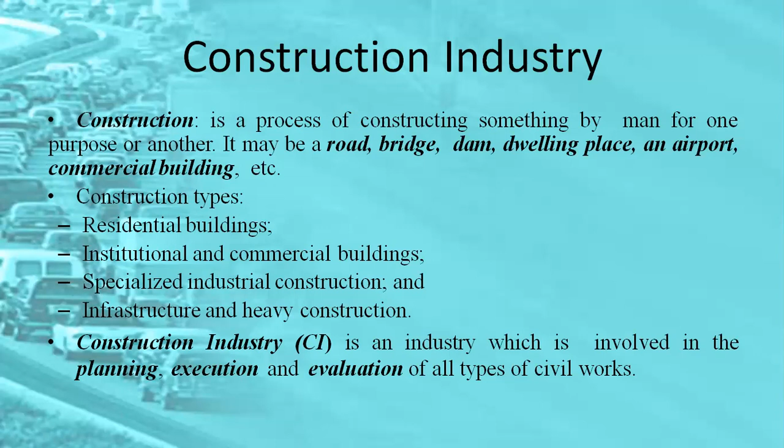If we see the term project, it is some form of human activity that has a beginning, a productive phase, and an end. It is creating something that did not exist before. A construction project is an investment of scarce resources with a definite objective, time horizon, and geographical boundary. Construction projects are mostly constructed on the ground and they are exposed fully to the local environment.

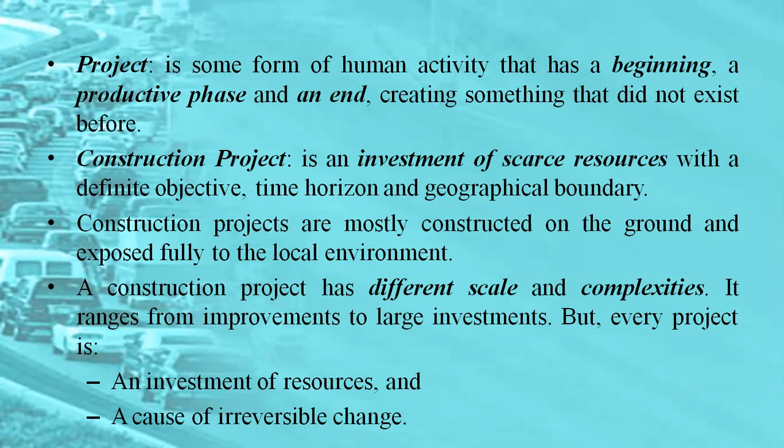Construction projects have different scales and complexities. They can range from improvements to large investments. But every project will have an investment of resources and a cause of irreversible change. These two points are very important while we are thinking about any construction project.

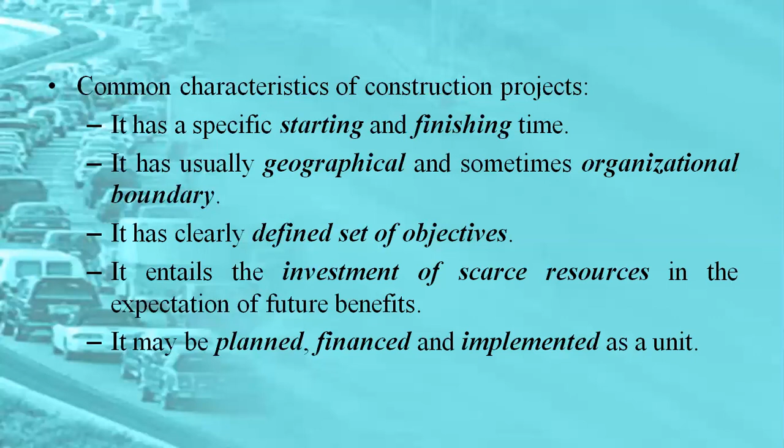Common characteristics of a construction project include: it has a specific starting and finishing time. It usually has a geographical and sometimes organizational boundary. It has a clearly defined set of objectives. It entails the investment of scarce resources in the expectation of future benefits. It may be planned, financed, and implemented as a unit.

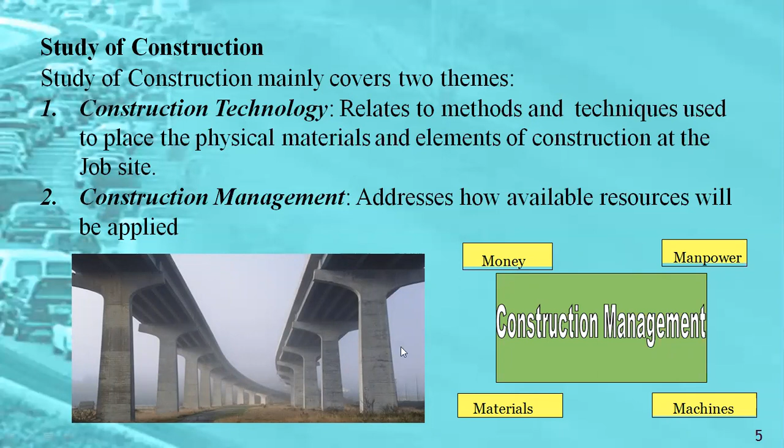So, the study of construction covers two main themes. First is construction technology, related to methods and techniques used to place physical material and elements of construction at the job site. Second is construction management, which addresses how the available resources will be applied. Construction management involves management of money, manpower, material, and machines. Basically, four M's come under construction management.

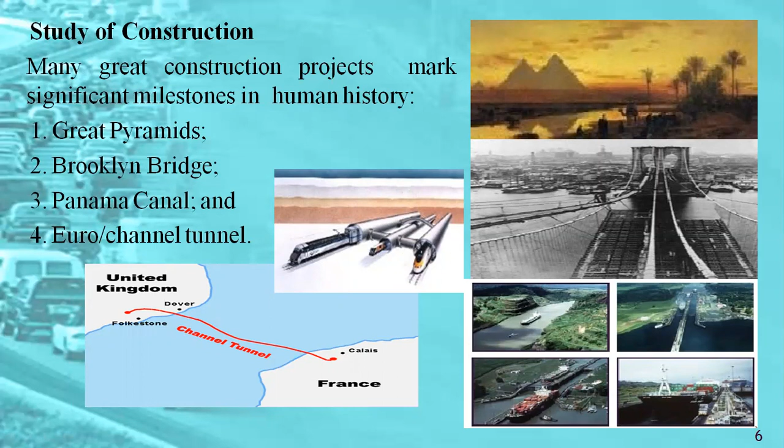The construction industry can be categorized into three major sectors: transportation and communication sector, water and energy sector, and building and other physical infrastructure. The transport and communication sector includes roads, railways, airways, and telecommunication related physical works. The second sector is water and energy works, including hydropower development, transmission lines, wind power generation, and irrigation projects. The third sector is building and other physical infrastructure.

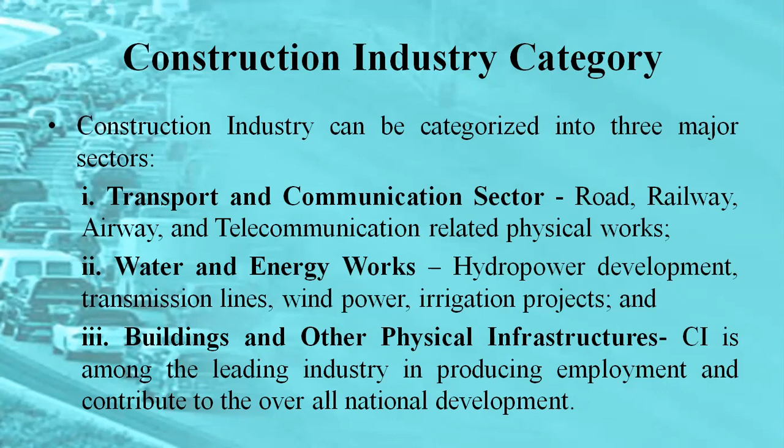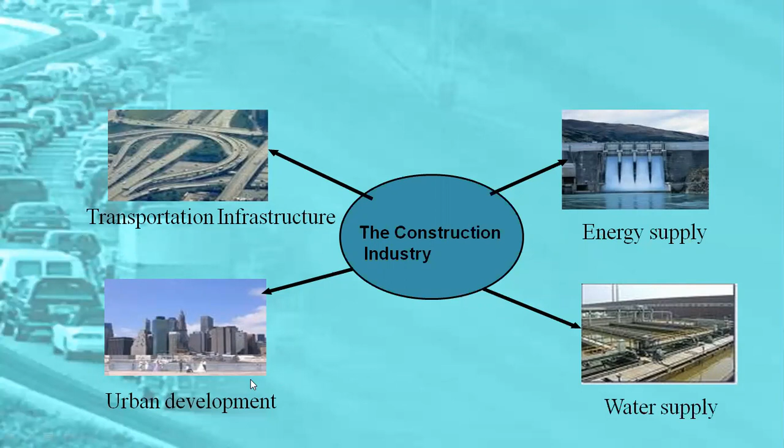The construction industry is among the leading industries in producing employment. It contributes to the overall development of the nation, and also by developing different infrastructure projects. So here we can say these are the four major sectors which form the construction industry: transportation infrastructure development, energy sector, urban development, and water supply, or we can say distribution network.

Now, different construction industry attributes. Among them, the nature of the construction industry depends upon the nature of production, that is, what is actually happening on the site. It includes a change in supply chain relationships at the production site. This industry is exposed to rather unpredictable weather conditions. It may have problems like seasonal disruption in the production lines, and health and safety concerns of the labor or safety concerns of the equipment.

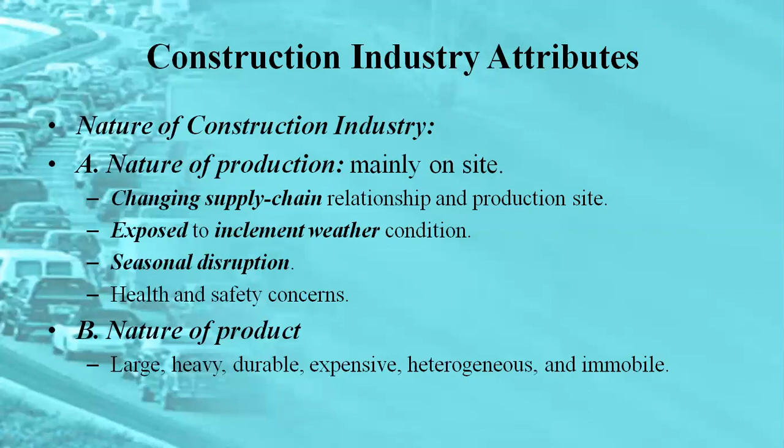Another is what type of product or what type of construction is going to happen. It can be large construction, heavy construction. We can use durable, expensive equipment. It can be heterogeneous. Some materials may be mobile, some may be immobile, like heavy cranes or fixed formworks. These are going to affect the construction industry.

Further, what is the actual demand of the product? Demand is usually dependent upon other goods and services. Demand cannot be controlled by the industry itself. In the majority of cases, clients define the requirements before the industry supplies. So the time lag between demand and supply is very crucial to decide the demand of the product.

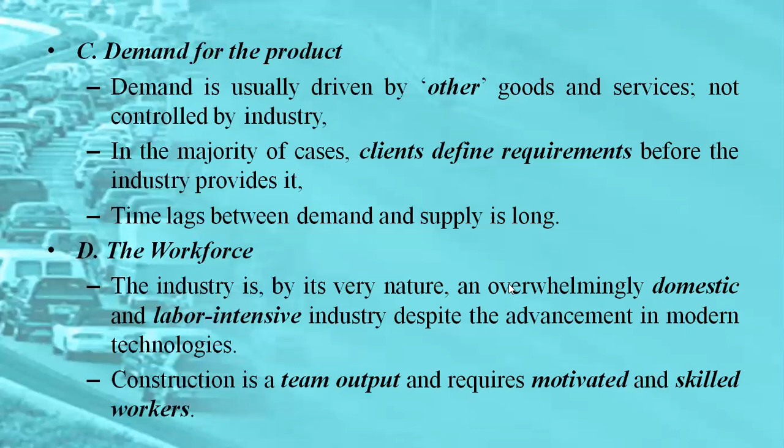The next important factor is the workforce. This industry by its nature is a domestic and labor intensive industry. Even after many advanced technologies, it is still dependent mainly upon manual work; it is a labor oriented industry. Construction is actually a team output, therefore it requires motivated and skilled workers, meaning it requires a good team.

So what defines the uniqueness of construction industry? This industry is actually a fragmented industry, meaning it is composed of many allied sectors, or it includes consultation of different experts. So if we try to put down the sequential process, first the need of the client has to be found out and highlighted.

Second comes design and planning for whatever has been needed. So if there is a need of a building, the plans and design can be made by the appropriate consultant, and then it is forwarded to the governing authority for appropriate sanction. After sanctioning, it will go to the tendering or bidding stage, and it has to be approved by the client. So the budgeted cost, the type of construction, the plans - these all have to be approved by the client.

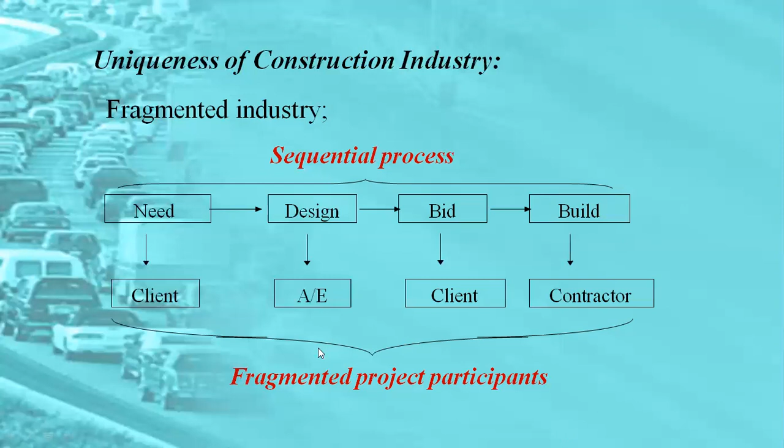After approval and finalization of the bid, a contractor is appointed and the contractor will do the actual construction activity. So at the top, we have written what are the sequential processes and what experts will be required, or what are the project participants who will perform this task or process.

If we see the amount of labor activity with respect to time, as the project starts in the initiating process, it requires less time and fewer activities. Even in the planning process, at the initial stage it consumes time and more effort, but with respect to time, as the plans are finalized, in the later stage the amount of activity will be less - only requiring some revision work.

In the execution process, initially the pace of work is less, but as time passes it requires substantial or large amounts of labor work involving large amounts of activities, and by the end of the process it becomes completely zero. Then the controlling process - throughout the project there should be proper control by a proper authority. Then at the last comes the closing procedures, meaning sanctions and approvals from different authorities, which are initiated only in the later part of the construction activity.

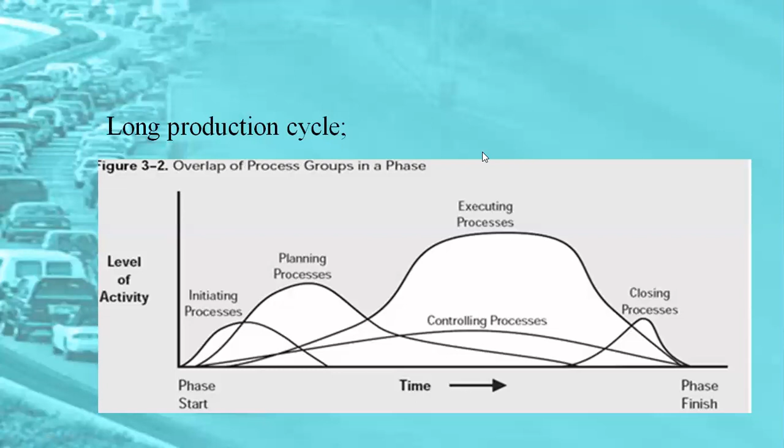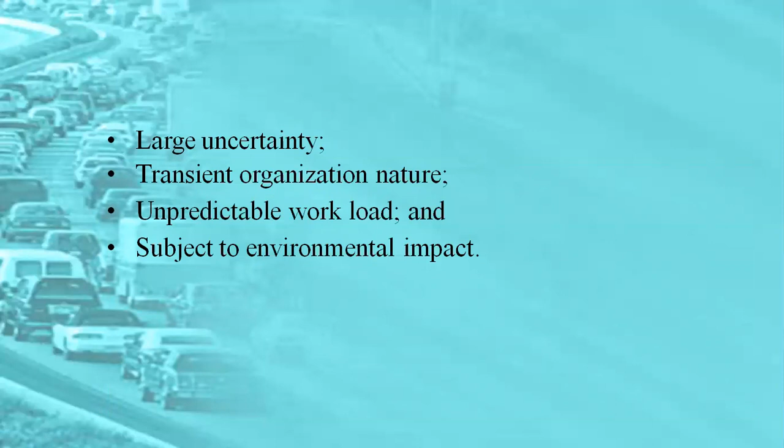So when we look at the uniqueness of the construction industry - importantly, it is largely uncertain. It has a transient organization nature. It has an unpredictable workload, and it is highly subject to environmental impacts.

Basically, what comes next is the role of the construction industry. Construction industry is the most important enabler for the social, economic, and political development of a country. It provides a basis upon which other sectors can grow, by constructing the physical facilities required for the production and distribution of goods and services.

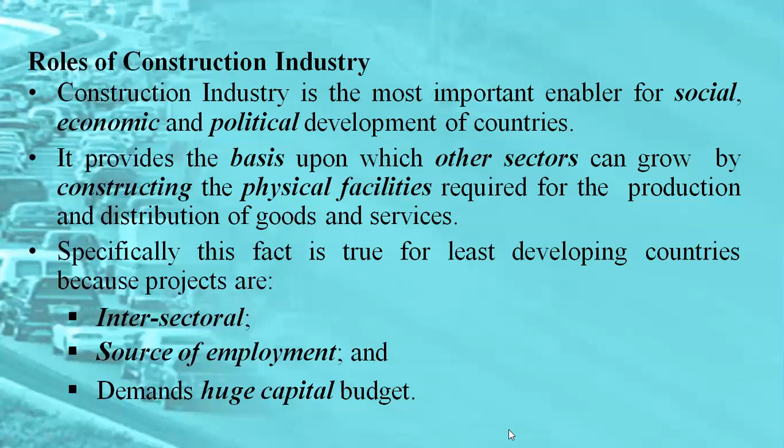This fact becomes extremely valid, or fits well, when we talk about developing nations, because it includes projects that are highly intersectoral - construction industry provides a source of employment, and it demands a huge capital budget of that nation.

This figure shows the construction project life cycle. The project life cycle of any construction project is a process through which the project is implemented from cradle to grave, meaning from start to end. If you see, it is actually a complete cycle.

As per market demands, some conceptual planning is done, then a feasibility study is done - here we define the project, its objective and scope. Then through the design and engineering department, we prepare various conceptual plans and preliminary designs. Then the plan specifications are finalized, and it goes for procurement and construction activity.

After construction activity ends, we get a ready project. This ready project will be available for the occupants to occupy and start their work. This involves acceptance of the facility, its checking, and then its use. During its use, it requires regular operation and maintenance activity, throughout its useful life.

By the end of its useful life, you have to finally dispose of this facility - it may include demolition or dismantling. After dismantling, as per new market needs, again the cycle is going to repeat, and it will start construction of a new facility.

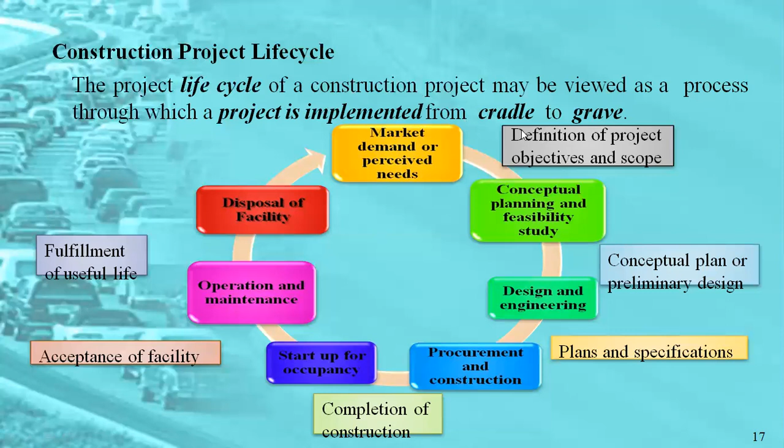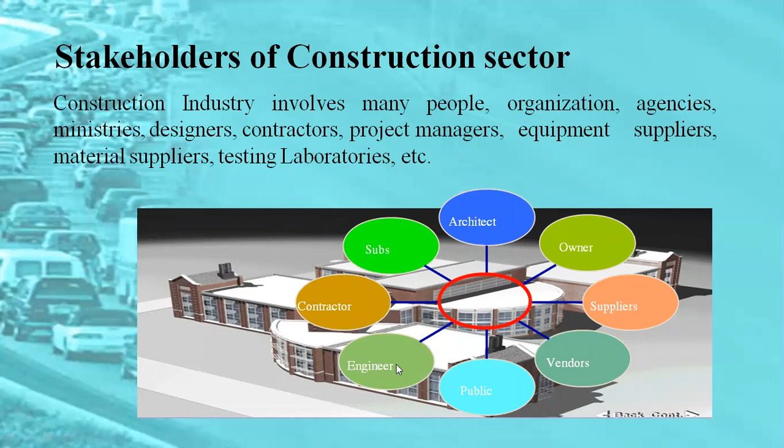Here we have to see who are the stakeholders or important participants of the construction sector. Construction industry involves many people, organizations, agencies, ministries. It includes designers, contractors, project managers, equipment suppliers, material suppliers, testing laboratories, etc. It can be architect, owner, supplier, vendors, general public, engineers, contractors, different subsidiaries, etc., contributing to the construction sector.

The non-contractual stakeholders include the public agency - statutory agencies like the fire department, public or municipal authority for different permits, then suppliers or end users. Non-contractual means there is no agreement between the owner of the construction activity or project and the user - there cannot be any agreement with the government authority, fire department, or suppliers. It just depends upon the give and take policy.

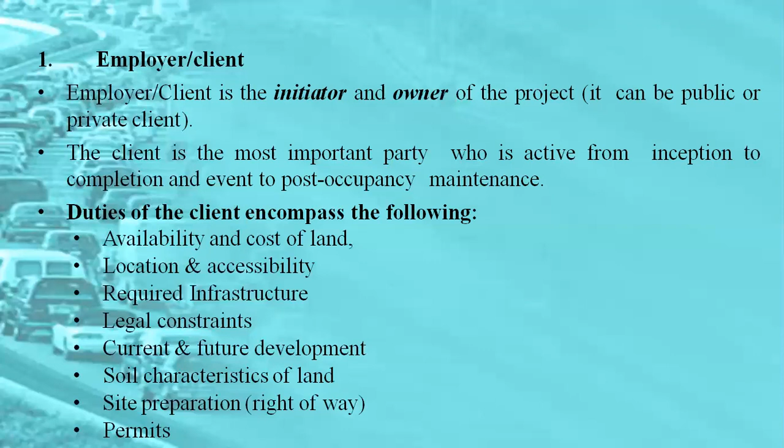Now what are the duties of the client? He should bear the availability and cost of the land. He has to look after the location and accessibility of the site, provide required infrastructure, look after legal constraints, check current and future development, check soil characteristics of the land, make the site ready for construction, and obtain different permits.

Second comes the consultant. The main role of the consultant is to interpret the client's project requirement into a specific design, and possibly supervision activity. The consultant team will ascertain, interpret, and formulate the client's requirement into an understandable project, and design the project to its requirements and constraints, imposed by different statutory obligations, technical feasibility, environmental conditions, site conditions, cost, etc.

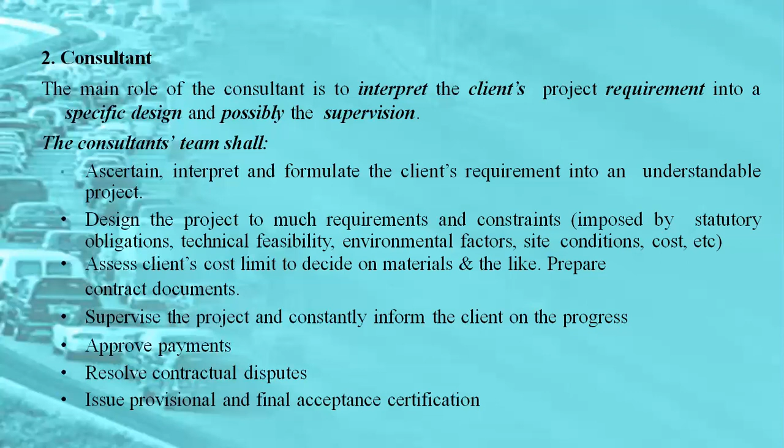They will assess the client's cost limit to decide what type of material to be used. Then they will prepare the contract documents, supervise the project and constantly inform the progress to the client, approve different payments, resolve any contractual disputes, and issue provisional and final acceptance certificates.

Third stakeholder is the contractor. This group is established mainly as commercial companies, working through a contract for construction or development projects. The responsibility of the contractor is to carry out full site investigation prior to submission of tender, then submit the tender, and after grant of tender, plan, program, and control the construction process, and notify the consultant about any delays, discrepancies, or problems.

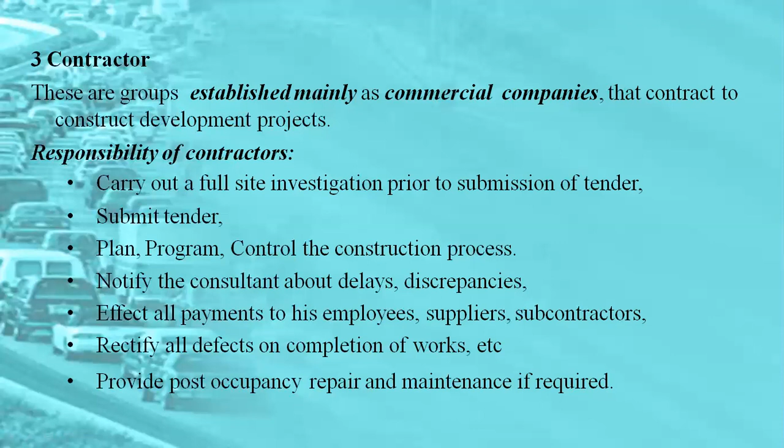The contractor will also effect all payments to employees, suppliers, or subcontractors, carry out rectification of all defects upon completion of the works, and thereby provide post-occupancy repairs and maintenance if required.

What are the resources of the construction industry? The following industry resources are vital components of the construction industry: human resources, meaning labor or workers; financial resources, meaning different forms of funds; information resources, such as testing reports, soil investigation reports, environmental factors, etc.; physical resources, like materials, equipment, and other assets; and finally services and management of consultant, contractor, and vendors.

What is the current status of the local construction industry? It can be distinguished by a lack of clear development objectives, inadequate coordination of planning between the industry and infrastructure programs in various sectors of the economy, heavy dependence on foreign resources for materials, equipment, and expertise which continue to be supplied to a major extent by foreign consultants and contractors, and transport bottlenecks in the distribution of construction materials and equipment.

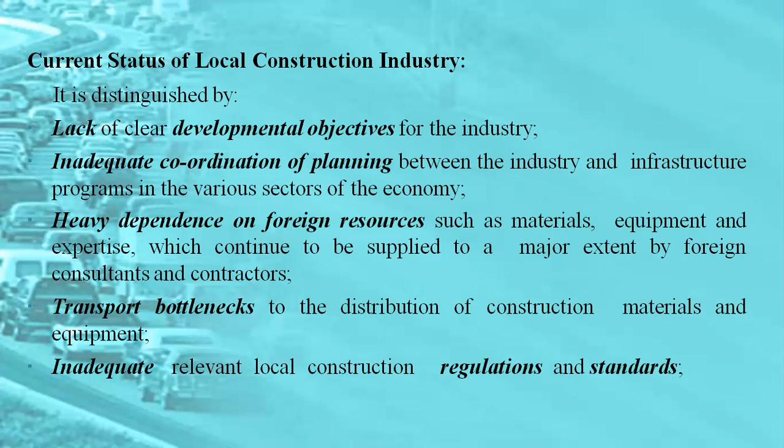There is inadequate information on local construction regulations and standards. There is control of the construction sector by small or medium-sized firms and parastatal construction enterprises operating at a low level of capacity with inadequate working capital. There are inadequate and ineffective organizations representing the interests only of the contractors, consultants, and engineers.

There are inadequate numbers of suitably qualified and experienced personnel at all levels—engineers, technicians, mechanics, operators, foremen, etc. There is inadequate consideration given to the use of local resources, especially participation of labor-based works, and little or no consideration given to the concept or cost of maintenance as a component in investment cost.

The general state of the domestic construction industry is characterized by 5 major deficiencies, which simplify what we have seen earlier: inadequate capital; use of old or limited number of equipment; low level of equipment availability and utilization; deficiency in technical, managerial, financial, and entrepreneurial skills; and insufficient and ineffective use of labor-based construction and maintenance technology.